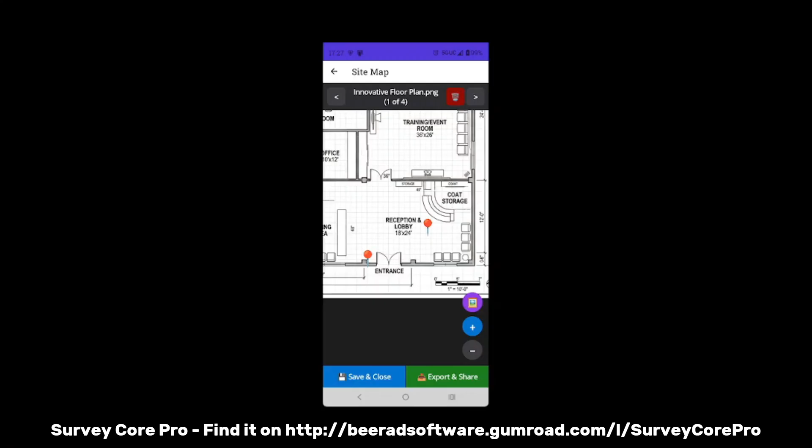Now we will assign names to these devices using the imported CSV file. While optional, this step is highly recommended for organization and clarity. In the navigation panel, notice that additional pages have been created, one for each image added. Tap the right arrow to return to the CSV page. Select the first row labeled Entrance Camera. You will see an option to link this entry to a photo.

By default, it may display the most recently added image, for example, photo 4. To correct this, tap the current selection and choose the appropriate image, in this case, photo 3. Then tap Add Link. Once linked, the device name will appear in blue, indicating that it is now associated with the specific page. This is important because upon export, the final PDF will be interactive with clickable links that navigate between pages. Repeat this process for the second entry, Lobby, ensuring it is linked to the correct image, photo 4.

Navigate forward using the right arrow. You will notice that the page title has updated from a generic label, for example, photo 3, to the assigned device name, Entrance Camera. This name is pulled directly from the CSV file. Continue navigating to confirm that all linked pages reflect the correct naming.

Once all devices are placed and labeled, you are ready to export. Tap the green Export button at the bottom of the screen. The technician will be presented with several options for sharing the completed survey file back to the office. Keep in mind that email may not be suitable due to large file sizes when multiple images are included. After successfully sharing the file, we will transition back to the desktop application to complete the workflow.

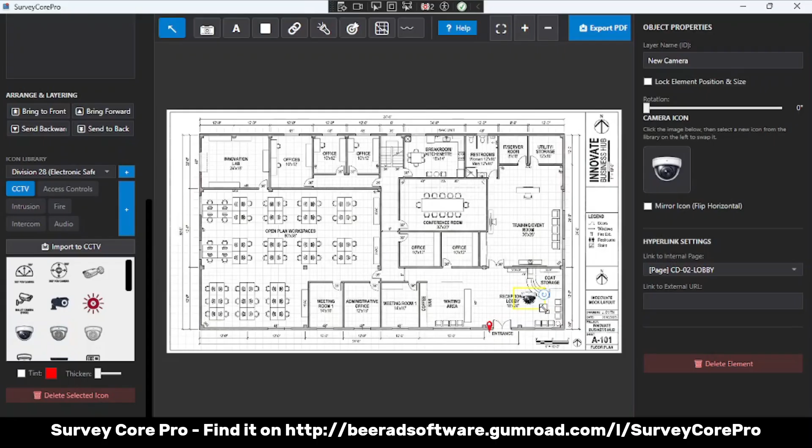Let's swap these generic pins for actual device icons. We'll select the first pin and choose a dome camera from our library. And change the second to a bullet camera. You can easily adjust the thickness and apply custom color tints to any icon.

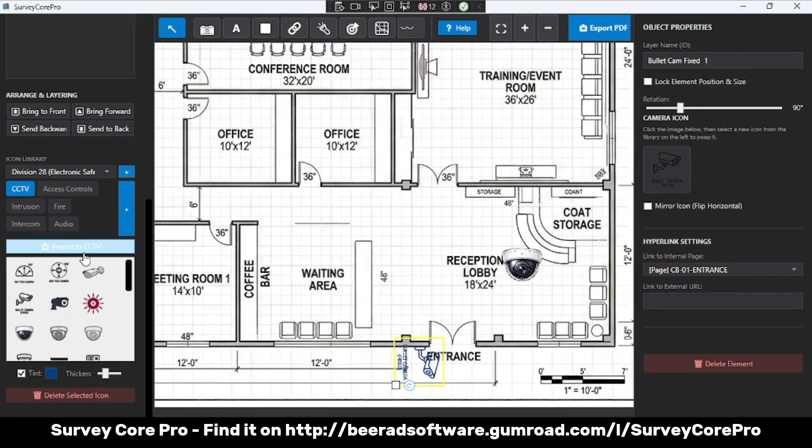And if you need specific hardware, you can easily import your own custom icons. Just use PNG files with a transparent background. If we select our new bullet camera, you'll notice the internal link is already set to page 3, the photo page our tech created in the mobile app. We can change this routing here if we want to, but we'll leave it as is. Let's quickly rename this layer to Bullet Cam Entrance for our reports.

We aren't limited to just what was marked in the field. Let's scroll through our library. Notice the helpful tooltips on hover. Select an NVR and drop it right into the server room using the placement tool.

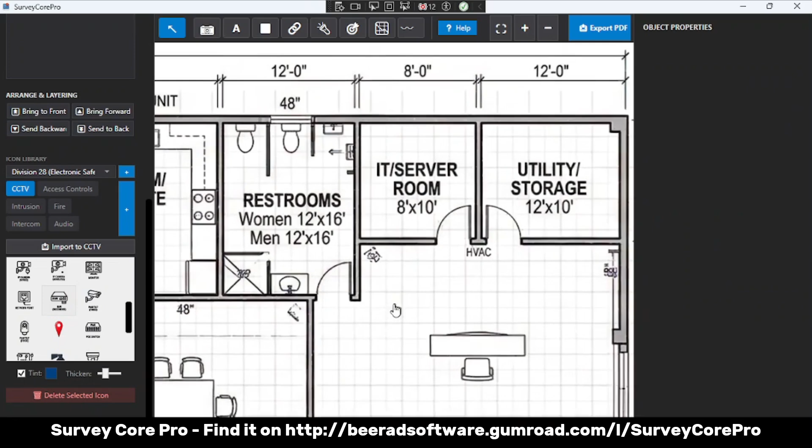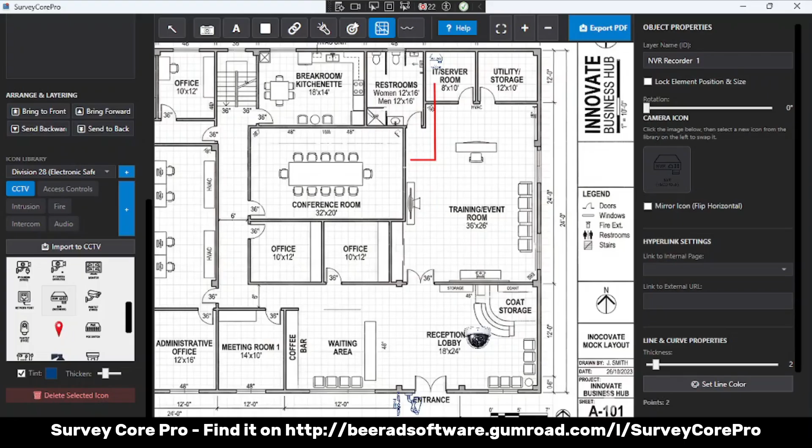To map out our infrastructure, we'll use the multi-point line tool. We can route our Cat6 from the server room out to our camera, holding the Shift key to snap our cable runs to perfect 90-degree angles. A simple right-click ends the run, and you can always drag the nodes to adjust the path later.

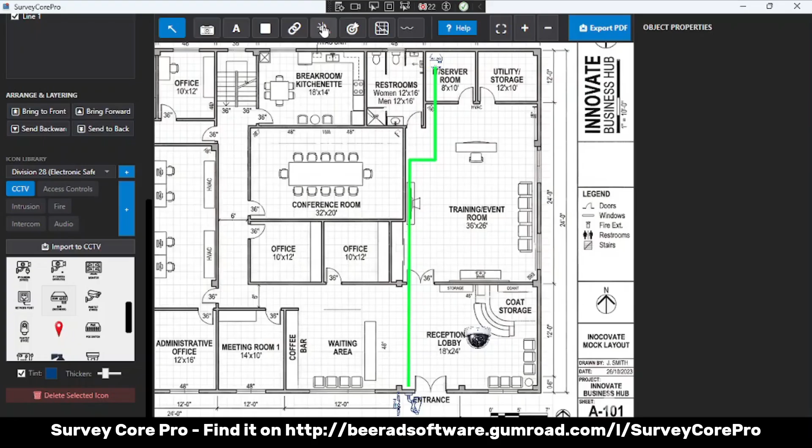Next, let's project our fields of view. We can dial in the exact viewing angle and color for each camera to visually prove our coverage area to the client.

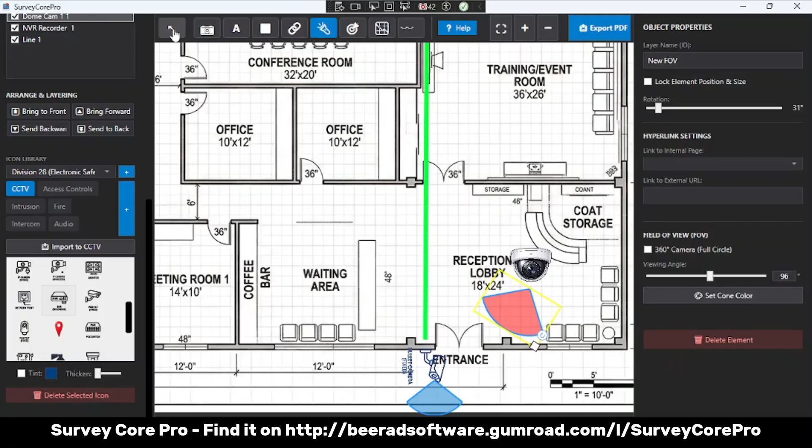Survey Core Pro lets you turn static data into interactive resources. Over on our CSV index, we can select a camera's model number and attach an external URL, turning that cell into a direct hyperlink to the manufacturer's product page.

Let's go to the actual site photo taken by our tech. We'll drop a custom button in the corner, label it floor plan, style it, and link it back to our main map. This creates a seamless navigation experience in the final export.

With the design complete, it's time to generate our deliverables. A single click generates an itemized takeoff report based on our custom categories. Finally, we export our master PDF.

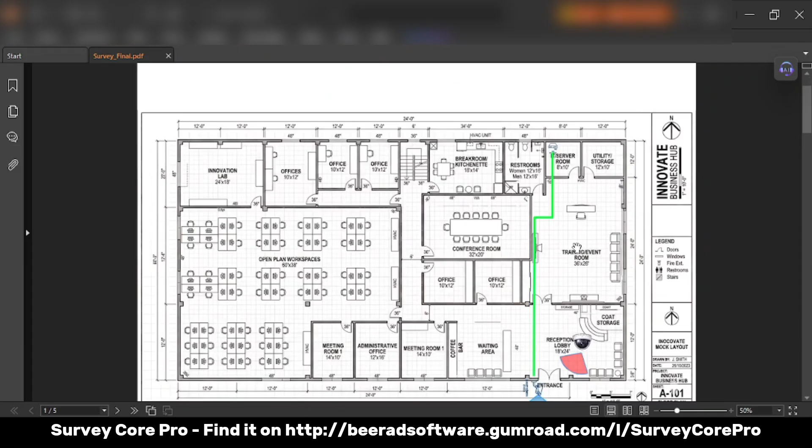This isn't just a flat document. It's a fully interactive site map. Clicking a camera icon instantly jumps the viewer to the exact field photo. Our custom button routes them right back to the floor plan. The CSV data links directly out to the web.

And at the very end of the document, the software has automatically attached our itemized takeoff sheet. From the field to the final quote, Survey Core Pro keeps your data connected.